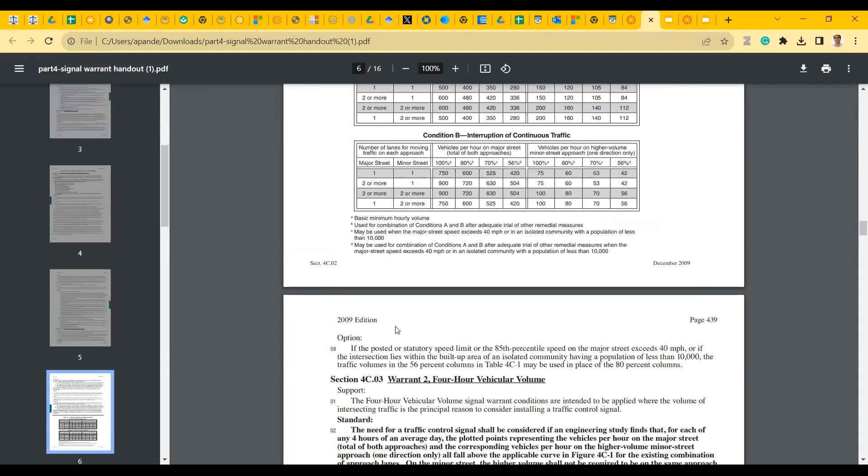The need for a traffic control signal. So I'm looking at 4C4, paragraph number 3. I probably should open the traffic signal warrant module here as well. One second. So this is the warrant handout, the one that I'm reading from, 4C4 paragraph number 3. Let's go back and... so here we are, 4C4, paragraph number 3.

Okay, so first thing it says: signal warrants should be applied only in unusual cases. So they're already talking about it. It should be unusual cases such as office complexes, manufacturing plants, industrial complexes, or high occupancy vehicle facilities that attract or discharge a large number of vehicles over a short time. So HOV facilities, that would be your trucks, or sort of your buses, right? So if you're basically right outside a bus depot, those are the situations where you want to be applying that.

So that's pretty important right here. The need for a traffic signal shall be considered if an engineering study finds that criteria in either of the following 2 categories is met. So there are 2 categories, A or B, and it's either of those. Within A, it's all 3 of those. So it's pretty confusing, that's why you have to be very careful as you're applying this. For example, they're saying either A or B, but within A, it's not just one of those 3 — it has to meet all 3 of those.

Okay, so that's my question for you. In the example problem that I supplied last time, please let me know if you're meeting the peak hour warrant. So let's take maybe the next couple of minutes, look at that warrant, and see if it's meeting that warrant.

Extras of that. Oh, okay, so let's see. Let me see. Yeah, and also I might have some extra copies there. Let me see, so you're looking... but you have the signal warrants though, right? Yeah, you have the warrants, right? So let me see if I have an extra copy of this. So the problem is in the notes, but you probably don't have the notes.

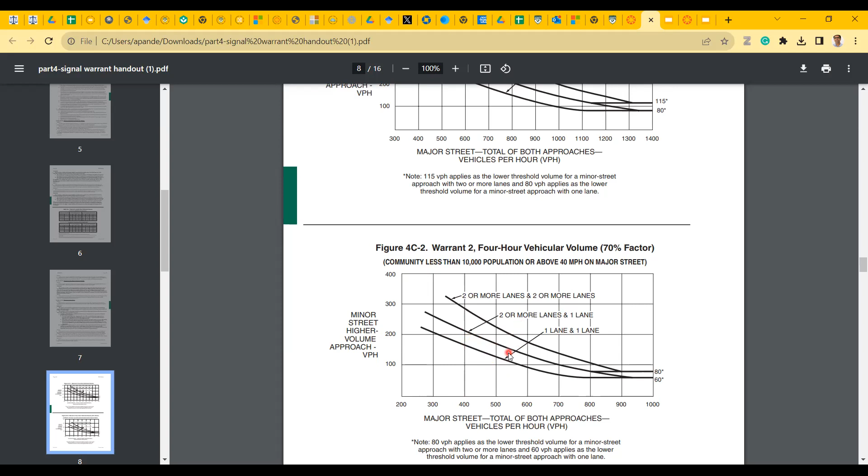Let's now look at warrant number 4, go back to the next section on this pedestrian volume warrant. And this is again a warrant where, because pedestrians are vulnerable road users—even though I wouldn't call it necessarily a safety warrant—this is where I would be a little bit less conservative about installing a signal. I would want to maybe install a signal just to take care of the pedestrians.

Isn't there a modern understanding that with the pedestrian warrant, rather than installing a signal, it could instead just warrant a pedestrian Hawk signal? Yeah, pedestrian hawk signal is another option.

So again, for all the signals, if you want to go ahead and put in a signal, remember we talked about how at the very beginning of this warrant discussion, they say exhaust all the alternatives first. So those will be sort of your alternatives that you have to think about. I know this is kind of a lot to process at this point, and maybe it's not exactly like something we do this way and that's the way it is.

That's just not the way things work in traffic engineering, right? So there's definitely a good point that you could consider a flashing pedestrian signal where pedestrians can push the button and then it turns red. Pretty good treatment there. But again, if the volume becomes too high, maybe that becomes an issue, right? So that signal warrant is there for the volume of the pedestrian. We are not going to put in a signal if you're not meeting the warrant necessarily.

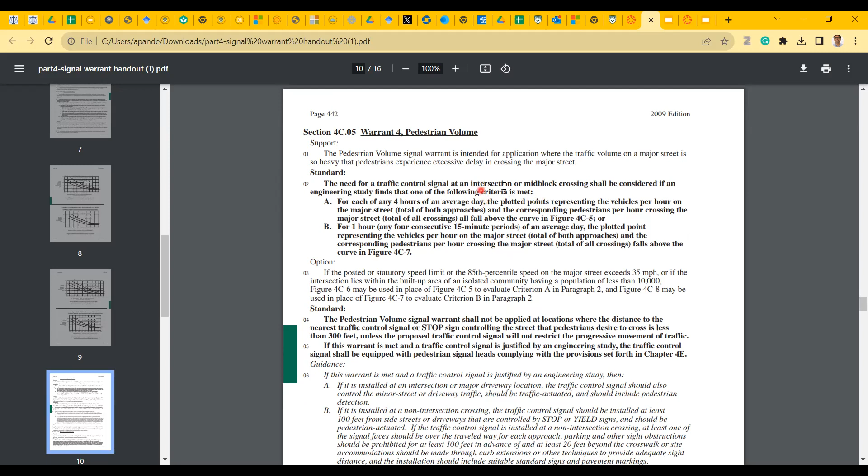So let's see what it says here: intersection or mid-block crossing. And then 4C6 is available too for us. 4C6 may be used for 4C5. Again, this is like that 70% condition that they're interested in. And then 4C8 may be used in terms of 4C7. So again, they give you some outs, but in this problem, that won't be an issue. But you want to be able to read and make sense of these. Just make sure that this is all making sense to you as you read through it.

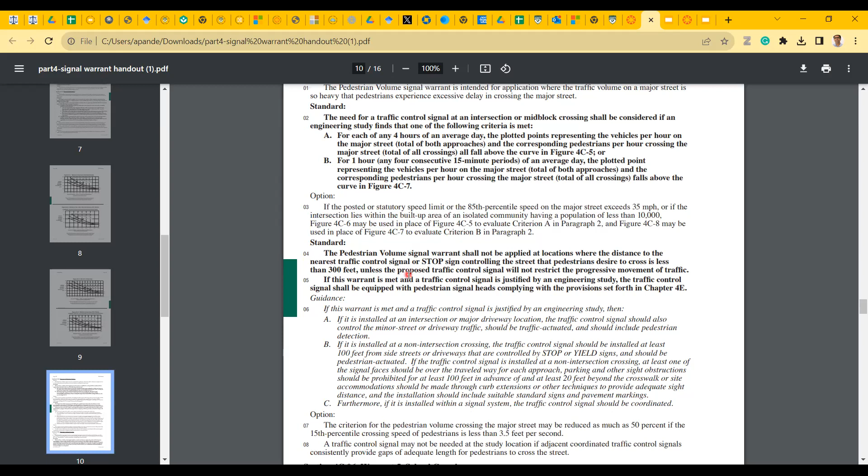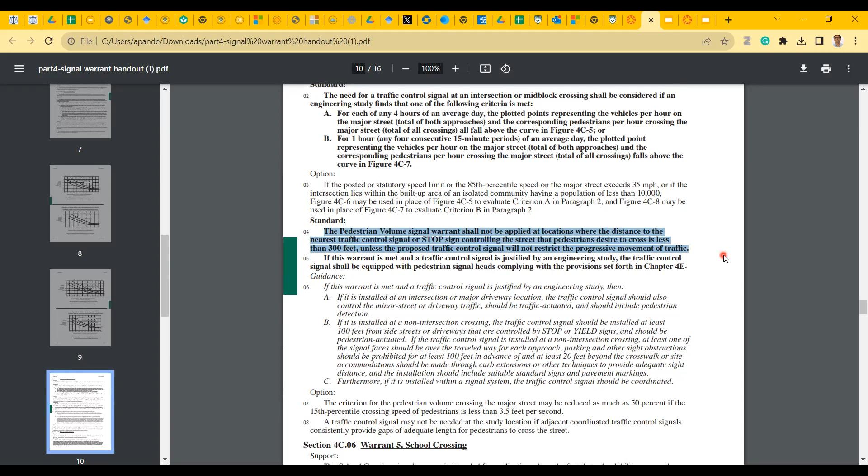Now, this is a statement that hopefully will change. I think they are going to change it in the future MUTCD, and I'm going to zoom in here a little bit more so you could see. This is the kind of language that a lot of modern traffic engineers don't like about MUTCD.

What do you think is my problem with this? What do you think is the issue here? Any thoughts on that? Anybody? Do you anticipate any problem with this at all? Yeah, basically that just encourages jaywalking, because by law, it prioritizes vehicle movement quite a bit.

And I'm not even, so this 300 feet, okay fine, you want people to be able to walk 300 feet in either direction. That could potentially be a longer walk for folks. And by putting in that last part of the sentence, unless the proposed traffic control signal will not restrict the progressive movement of traffic, that just sort of gives an indication that now you're prioritizing vehicular movement by a whole lot. That's something you have to be careful about, especially in this day and age.

Yes, I do know there is the issue of putting traffic signals too close to each other, where it's a safety issue for rear end collisions. They might confuse one light with the other.

That's absolutely right. So yeah, 300 feet is sort of a big threshold, and that should be okay. But you have to be absolutely clear, because sometimes we have to put two signals close to each other, and we have to make sure that the two lights are timed in a way that is a forgiving environment. If the two lights are close together and you don't know if drivers are going to see either one, you want to make sure they're timed so they don't cause confusion that leads to safety issues. So that's another thing to note there.

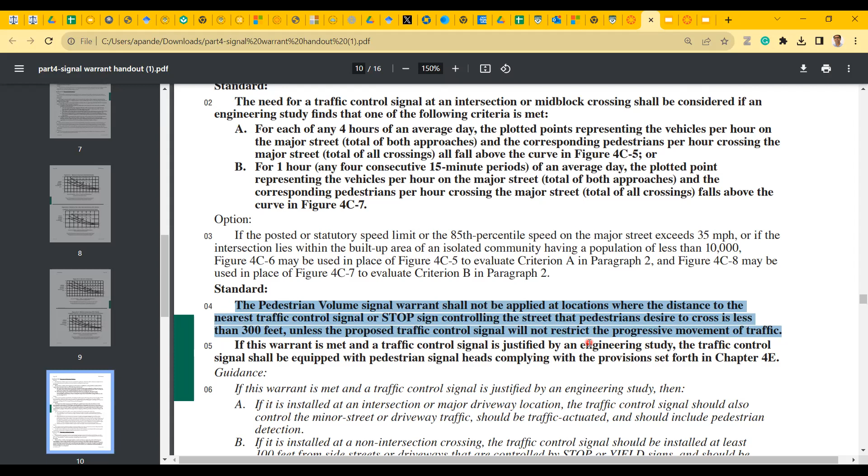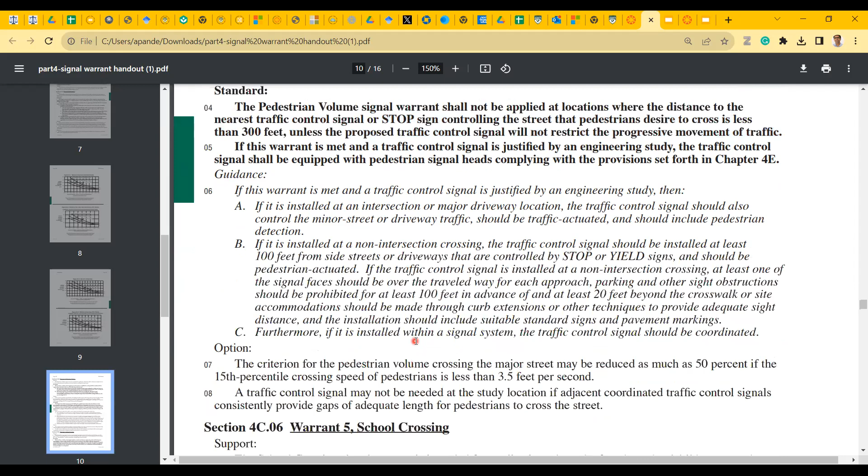Okay, so let's look at this 4C5. If you look at the option here, the criteria for pedestrian could be reduced by as much as 50%. Remember, this is what I talked about in the slides about the data you're going to collect - what type of data is necessary? Pedestrian volume during peak hour, noting elderly and disabled - that was exactly done for this warrant, thank you for pointing that out. So this is the option: if you're expecting slow walking pedestrians, you might have to be worried about this. There's no indication of that in my problem statement, so I'm not going to worry about it, but it's something to think about as you're analyzing your data. If you had a lot of pedestrians, slow walking pedestrians, then you could reduce it by 50%. That's pretty good that we should have that.

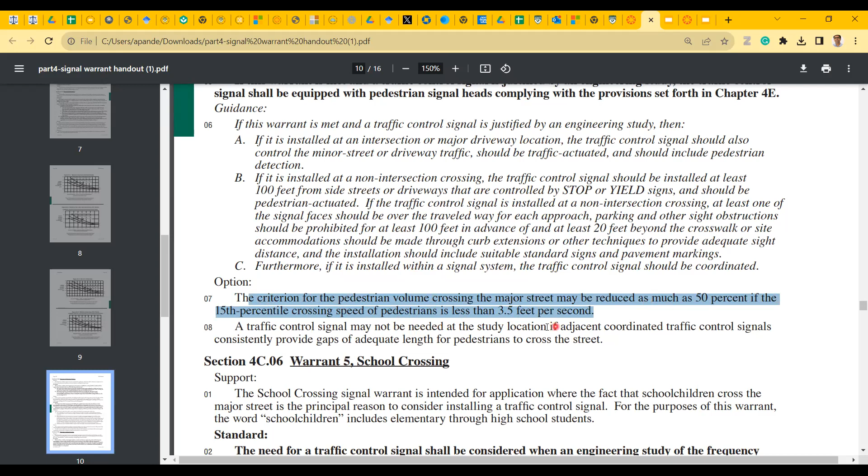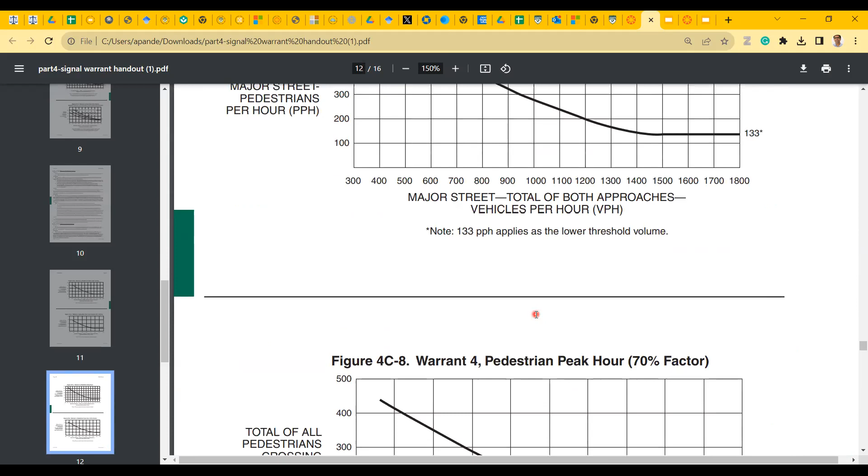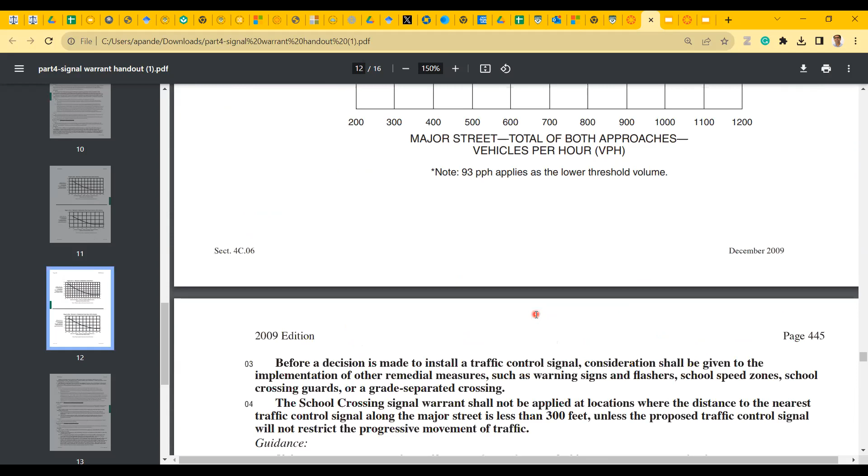Now, school crossing warrant. This is pretty similar to the pedestrian warrant, but it's about school crossings. This is not the figure - 4C6 and everything are for pedestrian warrant 4. But warrant 5 discussion begins here on page 445.

The School Crossing - again this is the 300 feet language, which is fine, but you're talking about other remedial measures, which is pretty important. See if you can provide grade separated crossings and all that.

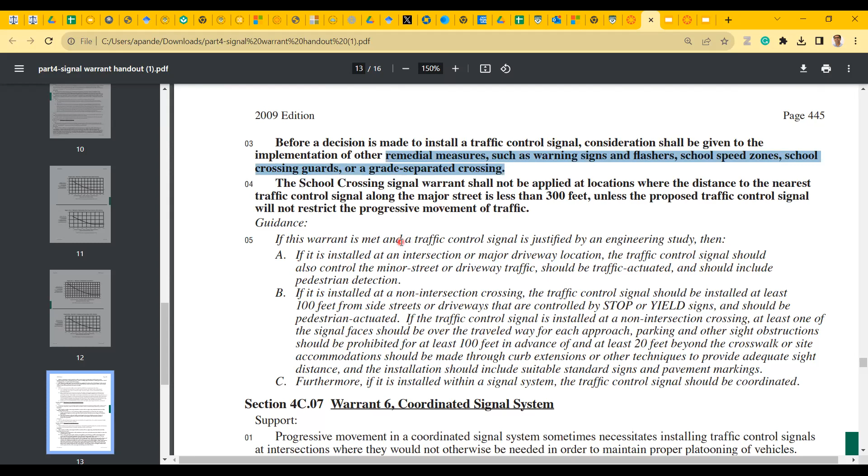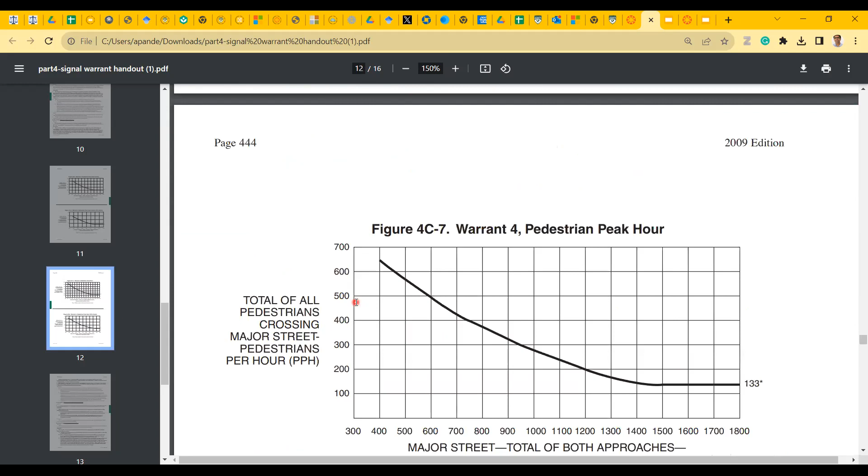The warrant itself is pretty similar to the pedestrian warrant. Frequency and the adequacy of gaps in the vehicle stream as related to the number and size of groups of school children at an established school crossing across the major street - this shows that the number of gaps during the period when school children are crossing is less than the number of minutes in the same period. This is kind of convoluted to write. There has to be 20 school children crossing during the highest crossing hours. That condition is pretty easy to meet for most schools, unless it's a very special education type school, but in most cases you'll meet that last part.

But here it's a convoluted way of writing, saying okay, if you don't find gaps equal to the number of minutes in that period - so if you have a 60-minute period, you should have 60 gaps. But I don't think school traffic persists for 60 minutes. School traffic will typically persist for maybe 20, 30, 40 minutes or something. So that's basically the number of gaps you need to have, otherwise you need a signal at that location. So something to keep in mind.

Number of adequate gaps - you need adequate gaps in the traffic stream. So if it's a 30-minute period where school activity is in the area, then you need 30 of those gaps within that period, so that school children don't have to wait more than 1 minute on average - that's the most important thing. So maybe when the bell rings, and maybe 2, 3, 4 minutes after that, you start your period of school activity, and then maybe in the next 20 to 30 minutes, depending on how big the school is, that's the amount of time it'll take.

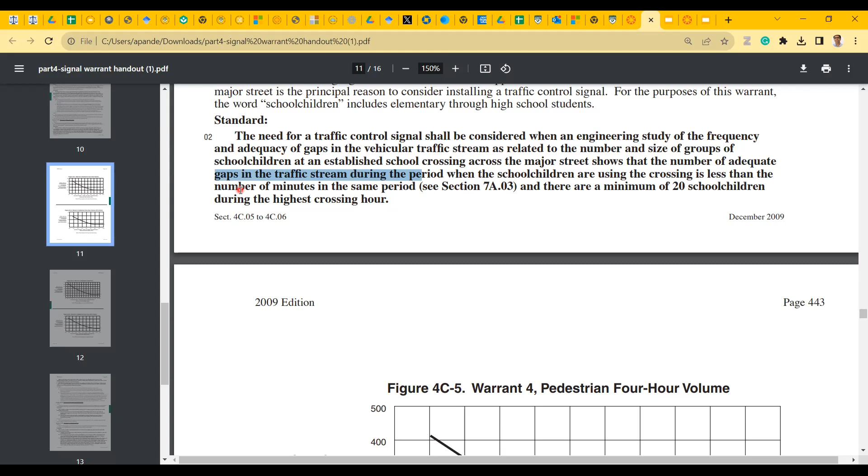So let's see, this is the school children.

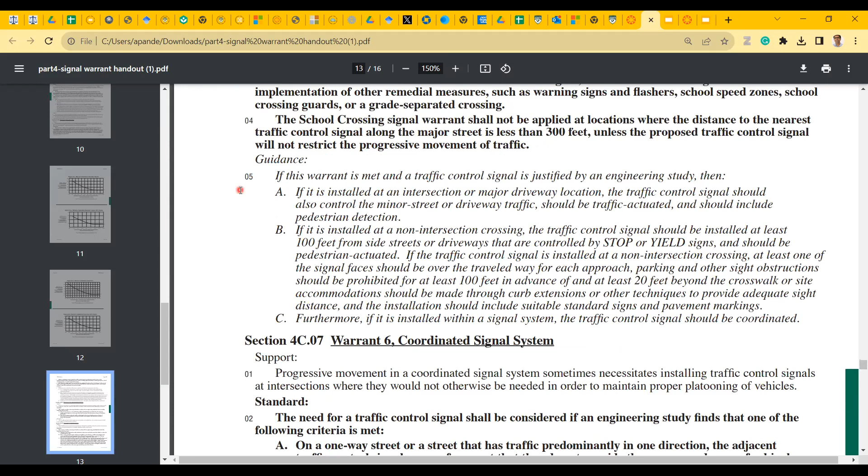Yeah, so there are some things you have to make sure you take care of. Install in a non-intersection location, like a mid-block crossing. It should be installed at least 100 feet from side streets or driveways, to make sure people aren't turning right into it and can still see the signal. So those are the conditions that are there.

So anytime these warrants come up, it's always a good idea to give it a good read before you do anything else, just so you know what all things you have to take care of as you're reading through it.

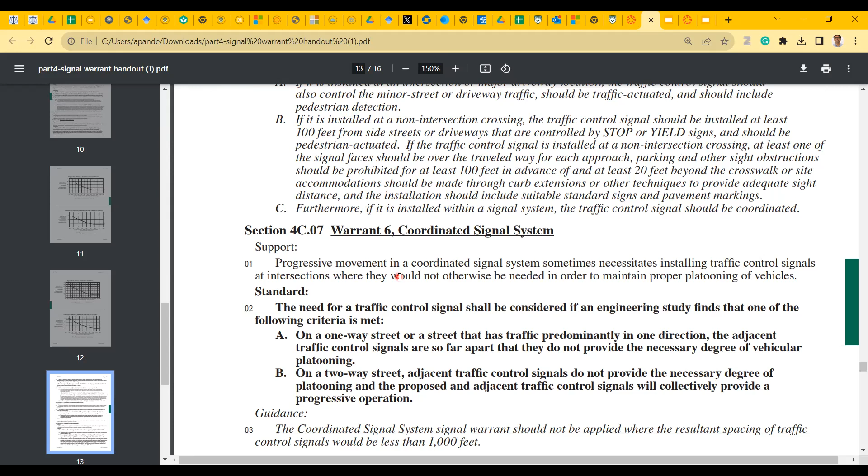If it's a case like that, with a mid-block crossing, and there wasn't a designated crossing there before, how does it decide? If that happens in my own city, and there was no crossing there before, is that just a random case? So if I'm understanding your question correctly, what you're trying to say is, what if you're not meeting this 100 feet condition, or the number of crossing conditions in the warrant, because there wasn't a crossing there before?

So what you're describing is that there is no existing demand because there is no crossing. Yeah, but then once there would be. Yeah, that's a great point. I was just going to look for an answer, probably because they looked at it in a safe route to school study, which has different parameters, or a different focus from a traffic operation standpoint. Yeah, so that's a good point, right?

It's like an old joke, like sometimes people will talk about how we're not going to build this bridge on a river because we don't see people trying to swim across the river a whole lot, right? That's the same idea, the same point you're making, that we don't have the crossing.

But typically what you want to do in that location is look at where the traffic is actually going. And again, if the kids are having to go a whole lot farther, and if you start to see even a few kids jaywalking, then I'd probably consider a roadway network warrant for that, like estimating a future condition. If there is, for example, that's one way of justifying a traffic signal there.

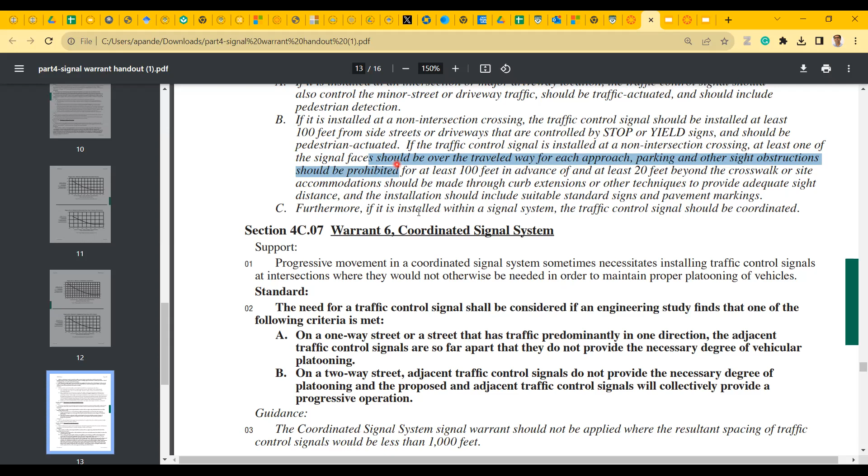Coordinated traffic signal - this is something relevant if you already have a coordinated signal system, but now there are one or two driveways where there are a lot of right turns or left turns happening, and you don't have that accounted for, and that's causing a problem. So that could justify a traffic signal.

But again, you have to make sure that the coordinated signal should not be applied where the resultant spacing of the signal would be less than 1,000 feet. So if the resulting spacing between traffic signals turns out to be less than 1,000 feet, you shouldn't worry about this signal. But if it's more than 1,000 feet away, and you're seeing a lot of merging from those driveways, you can start to think about signalizing that driveway.

An example of a coordinated signal system is where you have two traffic lights, and in between them on the corridor you have an all-way stop. That all-way stop could be the warrant to replace it with a traffic signal. But in a coordinated system, you probably don't want an all-way stop anyway, because then you don't know what speed you're going to use. Maybe a two-way stop could be converted into a traffic signal that way. In a coordinated signal system, the whole idea is that once the stream gets moving, it keeps moving throughout.

There is some talk about optimizing that stream for bicyclists, and there have been some implementations of those. If you optimize for bicyclists, you can actually encourage drivers to slow down too, because if they know this is optimized not for 40 miles per hour but maybe 18 to 20 miles an hour, drivers would be encouraged to drive slower as well, and that's where they'll get all the green. There are some real world examples of optimized or coordinated signals, and in this class we'll learn a little bit about optimizing the signals as well.

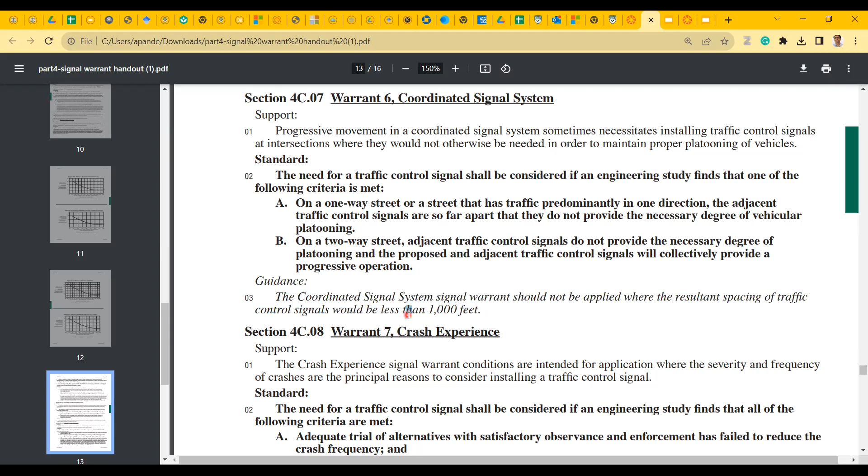So, this is again, if one of the following criteria are met, you only have to meet one of the criteria.

And I talked about platooning, did I talk to you about platooning? I think maybe in 222 class about platooning because they're going to do a spot speed study. But platooning is basically when vehicles bunch together so they have similar speed, and they kind of move together through the traffic stream. If the two signals are too far apart, the platoons get split up because some people drive slow, some people drive faster, and that leads to split up of the platoon, which is not good for coordination.

So we try to avoid that. If we see breakup of platoons happening, we want to provide a signal in the middle so we can maintain the traffic platoon. On a two-way street, adjacent traffic control may not provide the necessary degree of platooning. Same thing - you're basically looking at progressive movement of vehicles at an appropriately chosen speed.

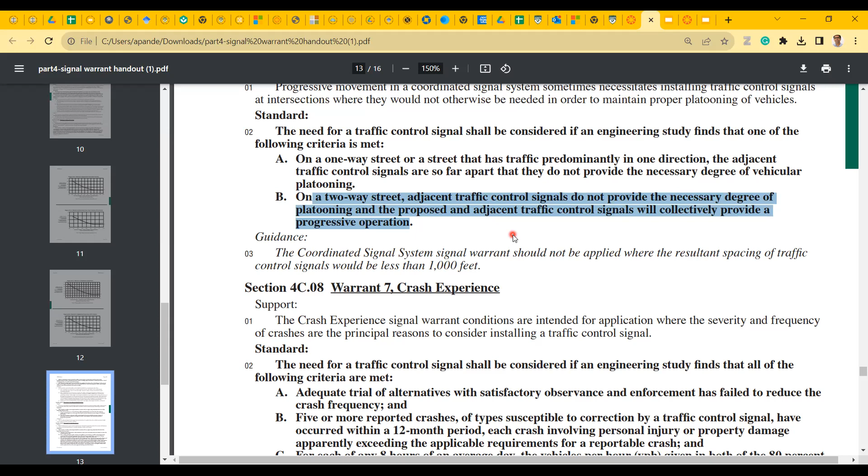In the next module, we'll learn to at least think about how you coordinate the system, what are some of the ways of coordinating, and what the signal timing looks like for that, and how you coordinate actuated traffic signals too. So all of our signals are going to be actuated, but then we pre-time them for the peak hour condition, and then we just run them on a pre-time basis.

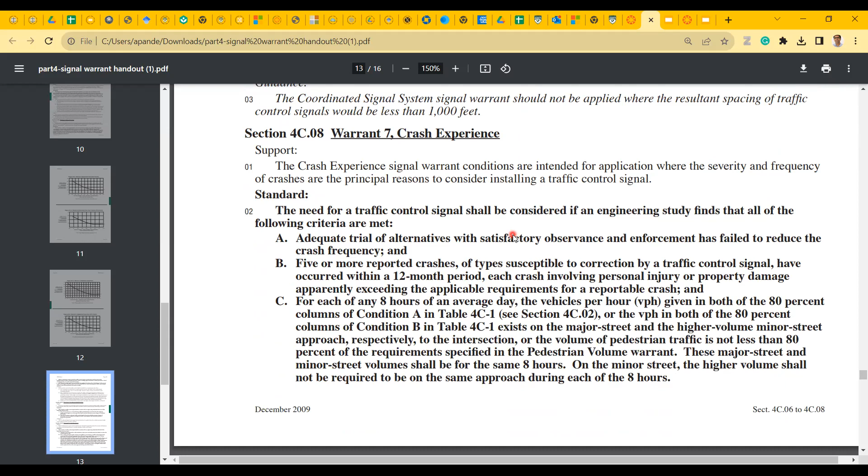Okay, the next warrant, very controversial. This is controversial because of this number right here: 5 or more reported crashes.

Basically, this type of crashes that are susceptible for improvement by traffic signals are your T-bones, right-angle crashes, or left-turn crashes where somebody turning left gets hit by someone going through. Those crashes - 5 - that's a pretty high number within a 12-month period. That's pretty high to me. When you're looking at 5 of these crashes, you're probably talking with newer cars, maybe not as many, but at least when these warrants were written, I'd say you're talking at least 5 people dead on average. Those types of crashes are pretty severe in nature.

So I think that number seems pretty high, and they still have a lot of couching language there. I think this is the warrant where I want to be less conservative and hope - I know it's not out yet, so I can't say for sure, but I'm almost certain this warrant will become a little bit less conservative in being able to put in the traffic signal as we go forward.

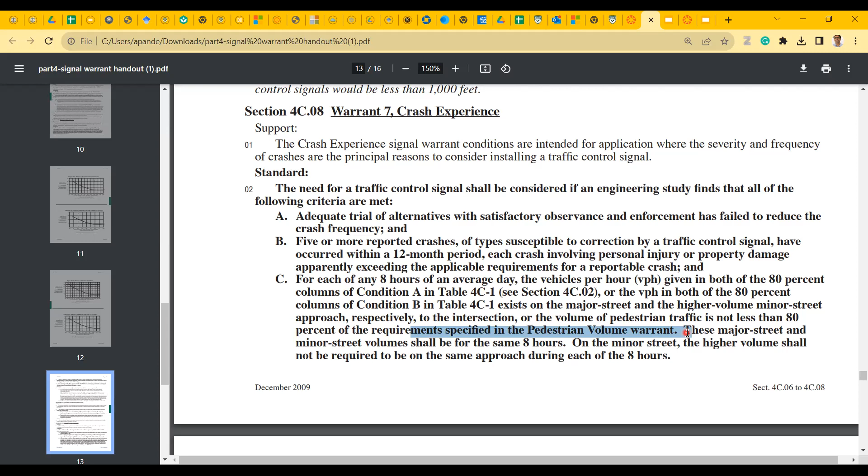So a lot of hoops to jump through for a safety warrant, given that we say safety is our priority, right? Again, we don't want to install traffic signals willy-nilly, but maybe the safety issue should be corrected before it gets so bad. For now, when we are applying these warrants, we're going to apply them as they're written. But as an engineering judgment, we'll look out for the new warrants as they come out and start thinking about what we can do to apply it. Again, it leaves a little bit more leeway if you have higher speeds and so forth.

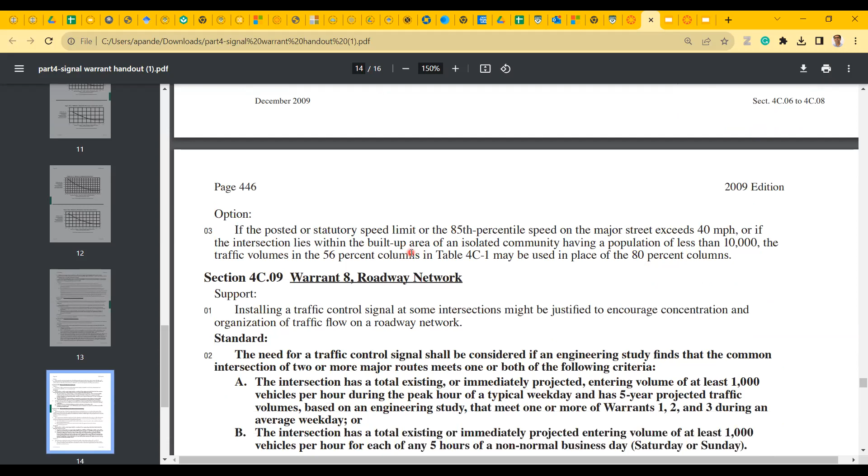So let's try to see if there is enough information for us to evaluate the safety warrant here. Let's go ahead and evaluate the safety warrant. Are there enough crashes that are amenable to be improved by a traffic signal in this case?

So rear ends are definitely not that - you can exclude rear ends. Rear ends are not something that gets taken care of by a traffic signal. In fact, a traffic signal makes the rear end crash problem worse.

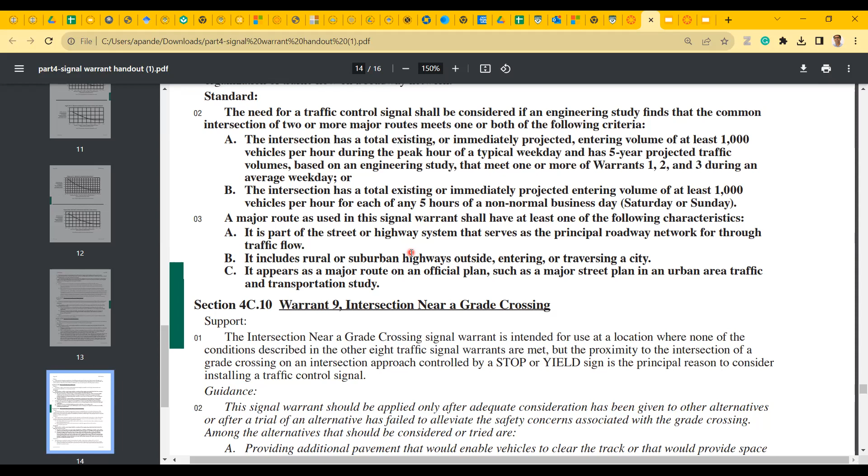What do you think? Any thoughts, any questions? Talk to each other if you need to, feel free to do that. Are we meeting the pedestrian or the safety warrant? Because it is really standard around that.

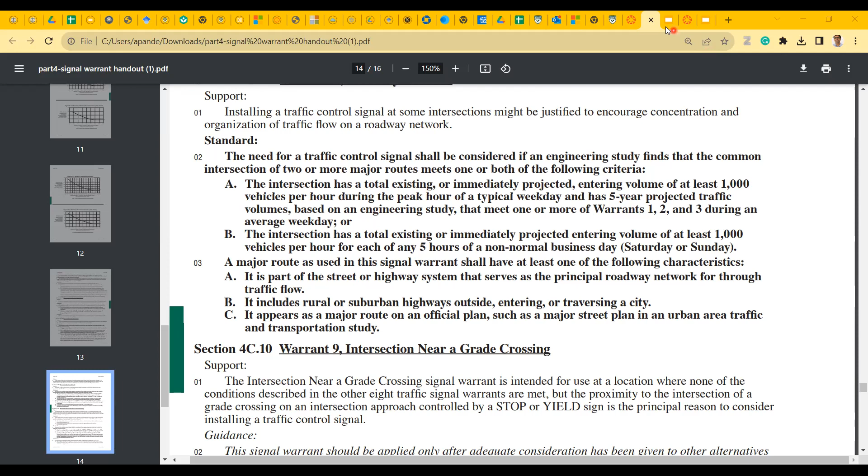Okay, questions, thoughts? So let's think about how many crashes are actually happening if you look at the sheet there - look at your collision diagram. How many crashes are actually happening here that are amenable to be improved by traffic signals? So we talked about those things, right? What crashes are amenable to be improved by a traffic signal here - right angle, left turn, head on. So tell me which of these are amenable here.

Are there enough in a 1 year period? No. Or which ones are there, how many do we have - one or two? So look at this, there is no left turn head-on crash, right? I don't see any left turn head-on crash.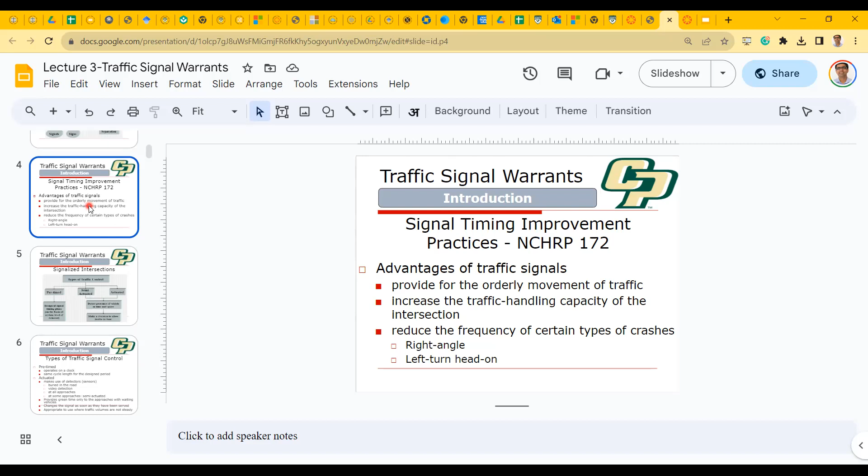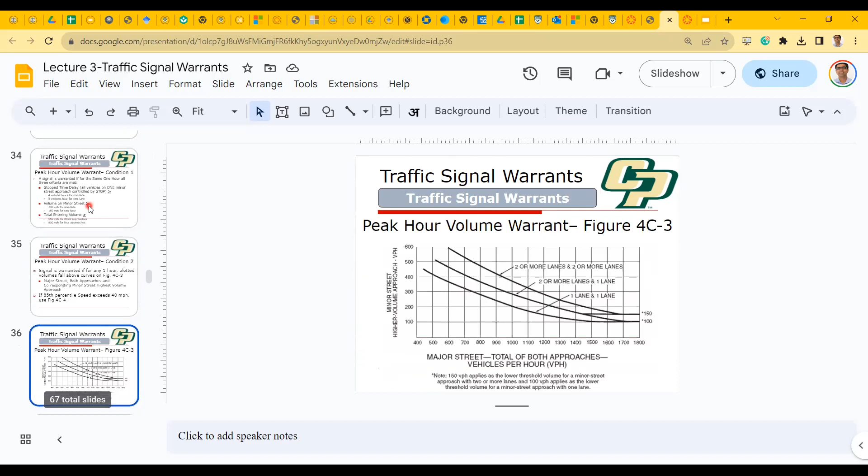So let's look at the data here - collision diagram, do I have it here? Okay, so I don't have the data here. Okay, so if you look at the chart that I shared with you, the problem statement, you will see that there are 6 different crashes here. 5 and 6 are rear end crashes, 1 is a side swipe, 4 is a side swipe, and 3 is a side swipe as well. And then 2 is a right angle crash. So actually, there has been only 1 crash that matters - that means you're not meeting the safety warrant at this location. Okay? So yeah, sorry.

So if you look at that chart, you have to be careful - for some reason I thought these were the numbers, but no, they are basically describing the 6 different crashes. The collision diagram just describes those things, unless there are so many collision diagrams that representing it becomes an issue. But in this case it's just 6 different crashes, and they're drawing them out at each location. So that's what it is.

Okay, so safety warrant is not met then. Let's look at warrant number 8.

Warrant number 8 is about roadway network. So roadway network warrant is existing or immediately projected at least 1,000 vehicles on a typical weekday that meet one or more of warrants 1, 2, or 3 on an average weekday. So you only have to meet - finds that common intersection of 2 or more major routes, meets one or both of the following criteria.

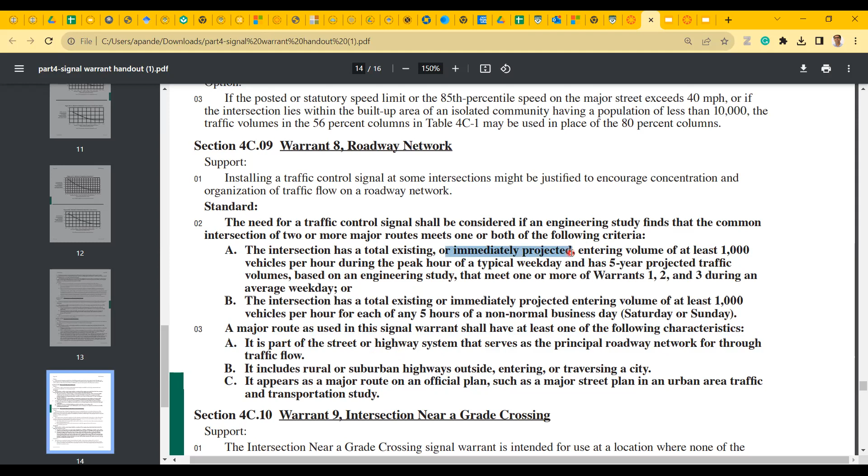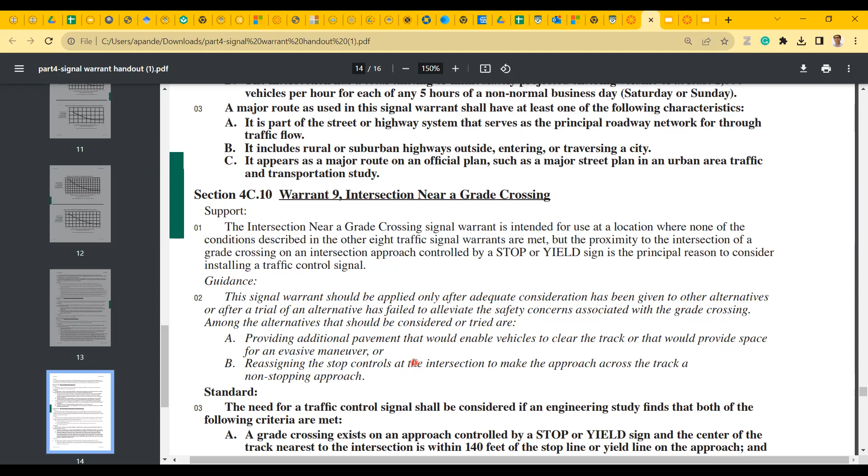And then let's look at the last one. The last one is not applicable either in this case, because the nearest railroad crossing is 2 miles away, if you look at the problem statement. So I'm not going to worry about it, but this is something that you have to think about.

I think this may have been the warrant - I mean, we have enough traffic here, so maybe not. But if none of these other warrants were met, we would have looked at this warrant to put a signal on Foothill and California, because we are at that close location on Foothill Boulevard. But again, that will probably meet all the other warrants as well - there's such high traffic there, so we wouldn't worry about this.

But if you look at the standard for this, it's to take care of the railroad crossing. So when you say grade crossing, that could mean a lot of things - grade crossing could potentially mean all intersections are grade crossings. But here we're talking specifically about the word that's not mentioned here: railroad. So it's a railroad crossing we're talking about.

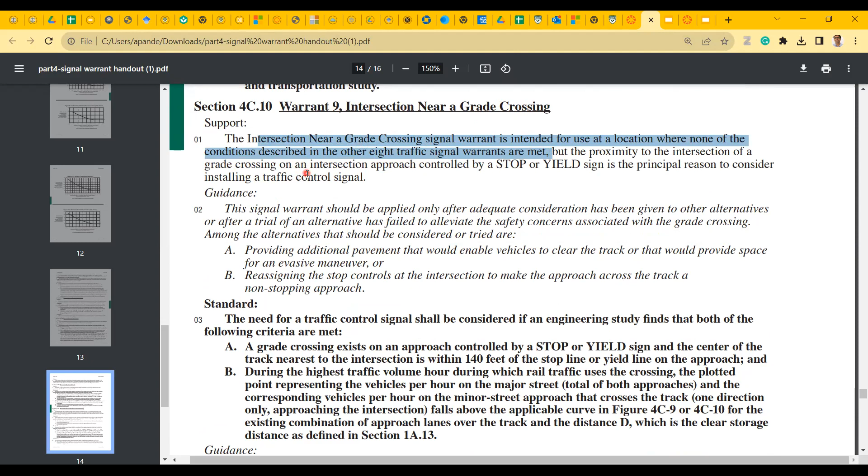So warrant 9 is about railroad - the intersection near a grade crossing signal warrant. Look at when none of the conditions described are met, but the proximity of the intersection to a grade crossing on an intersection approach is controlled by a stop or yield sign. Okay, so this is a diagram. This is what you're looking at - you have the major street, you have the minor street on the grade crossing. You're talking about this type of situation.

2 or more approach lanes at the track crossing, and then you have 1 approach lane at the track crossing. Okay, so 2 different conditions, whether you have 1 approach lane or 2 approach lanes. How many do you think we have on Foothill Boulevard? What's the condition there, right?

So you think about it - if you've driven through Foothill Boulevard, how many roads are approaching the railroad crossing? How many lanes are approaching the railroad crossing in each direction? How many approach lanes at the grade crossing - is it 1 or 2? There are 2 in each direction.

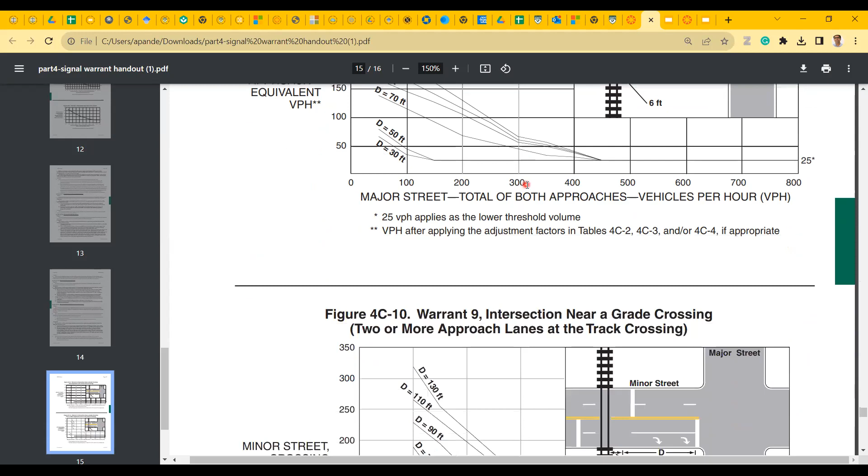So if you were applying this warrant at that location, you're basically dealing with this situation right here - yeah, you are in fact dealing with this situation. And then again, the chart is based on how big is this distance D from the stop line, 6 feet away from the railroad crossing right-of-way here. So this is your D value - D is 30 feet. The thresholds are going to be very low for you to put the signal. Okay, and where are you putting the signal?

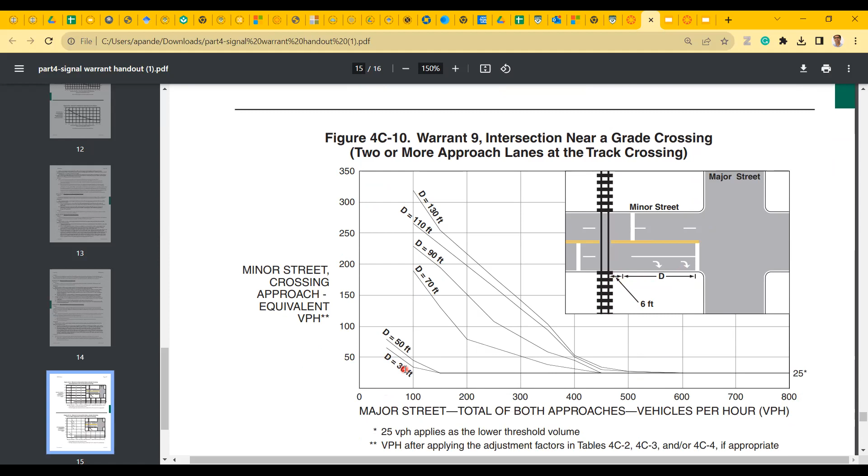So this is another thing that you have to think about. We're not talking about putting a signal based on proximity to the intersection of a grade crossing on an intersection approach controlled by a stop or yield sign. So just want to make sure that you understand that we're talking about putting a signal over here.

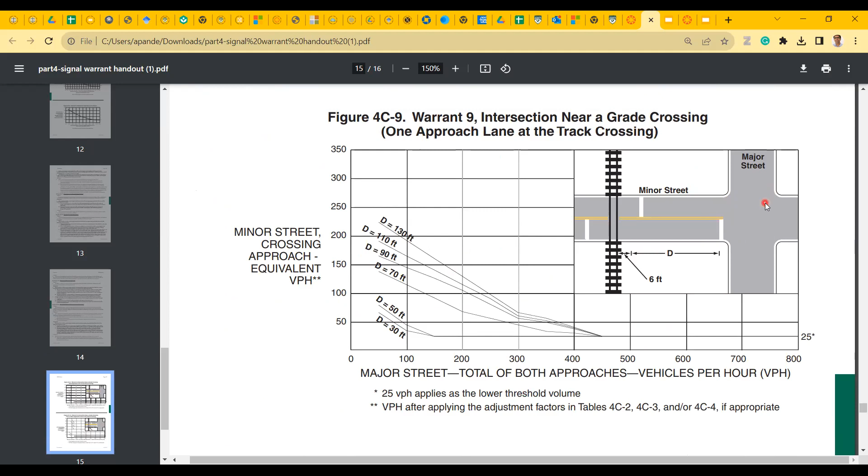Okay, we obviously want to make sure our crossing itself is protected. But the question is, do we need a signal right here? Yes, this is checked primarily to make sure it can be synced up with the preemption, to ensure there's not a situation where a vehicle gets stuck on the tracks.

Definitely you want to make sure that's not the case. You want to make sure the queue near here, the queue on this lane, doesn't back up. You want to take care of this, but you don't want the queue backing up over here and people getting stuck, or a situation where this lane backs up and causes problems over here.

This is going to be a problem if your timing is not clear. If you decide to put in a signal based on this warrant, your timing has to make sure people are not getting stuck here by any means. You'll also need 'do not block intersection' signage and everything to go along with that. You want to make sure there are no vehicles getting stuck over here.

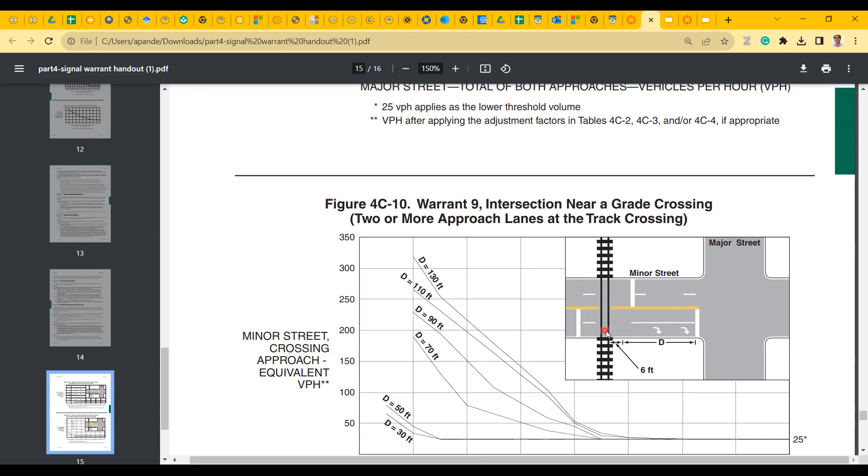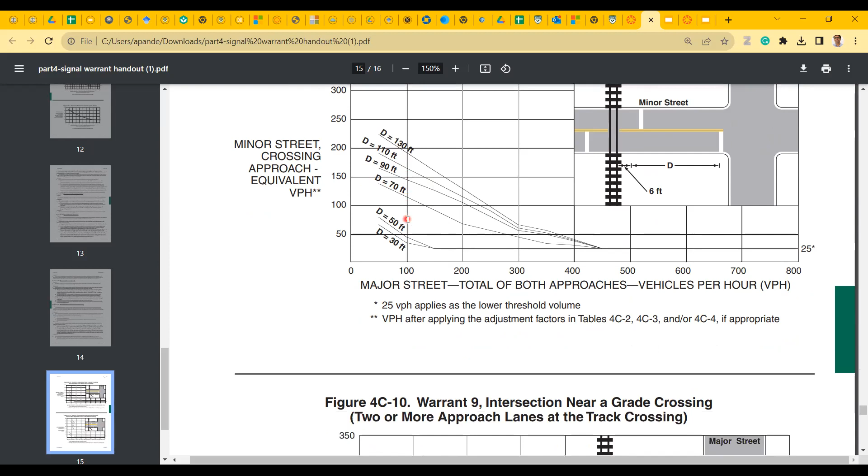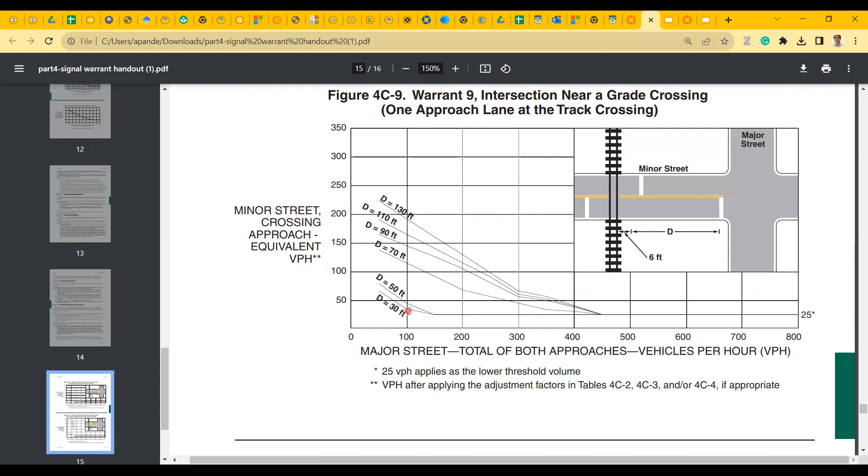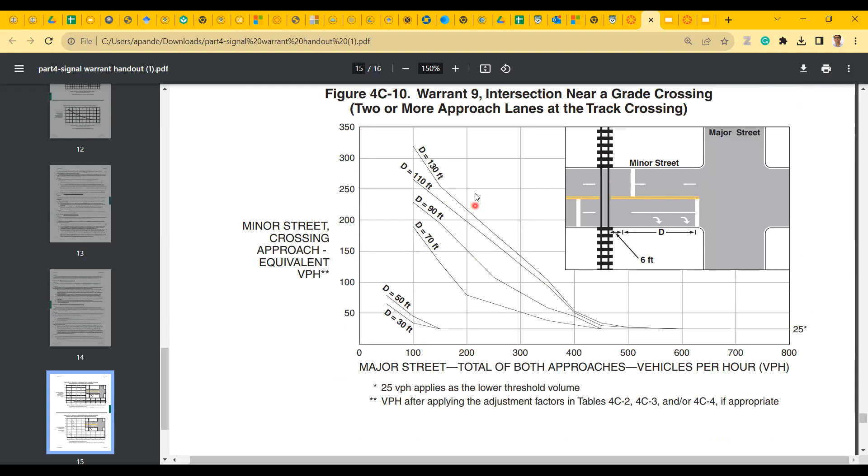The thresholds in this case are going to be a little higher. If you look at just one lane versus a 2-lane approach, here's what the thresholds look like. For 50 feet, the threshold could be as low as 150, and even 150 will meet the threshold on a 2-lane approach. But let's look at if D is a larger number, like 130 feet - then 200 and 250 will meet the threshold.

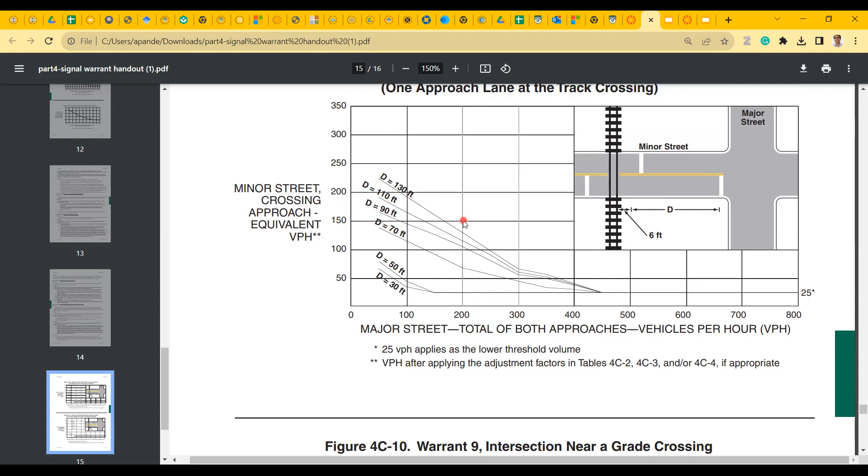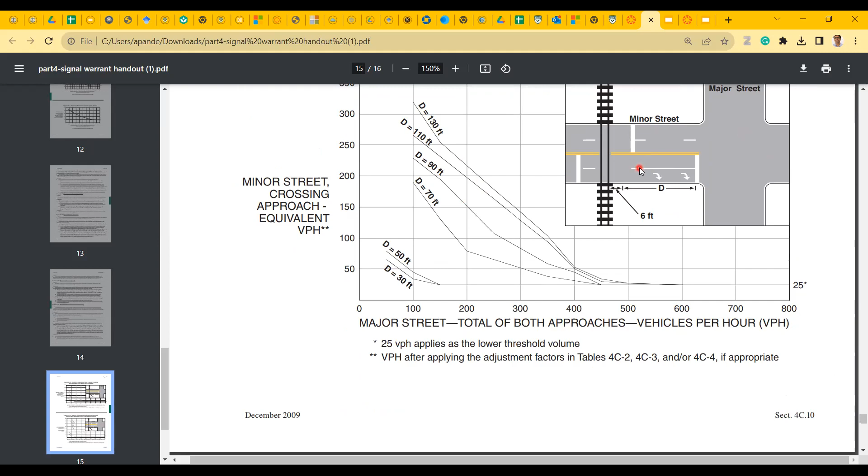Even a lower number will meet the threshold on a 1-lane approach, because with one lane you're backing up the queue quite a bit. But do you see that the threshold goes up when you're talking about 2 lanes? That's because the traffic can divide itself into 2 lanes rather than being in a single lane. So the requirements are more conservative when you only have 1 lane - you'd put the signal in at a lower threshold there.

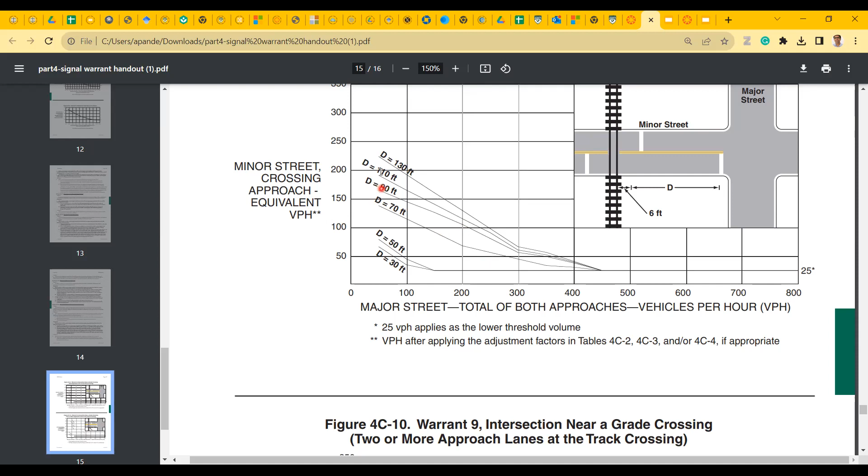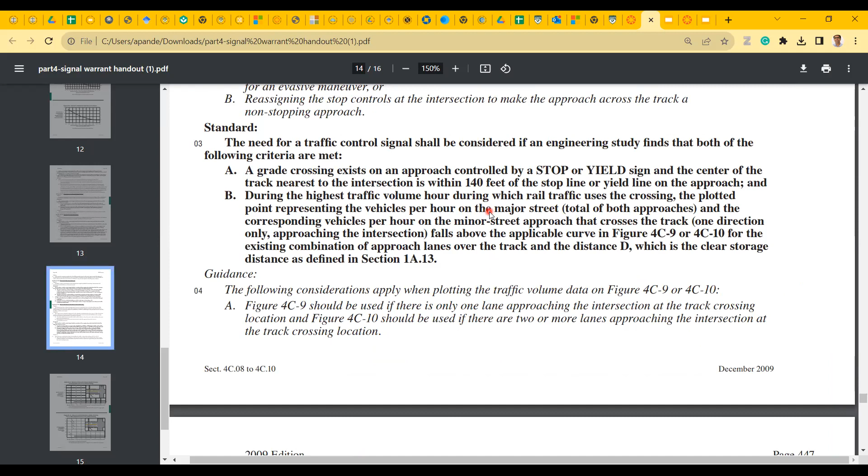So again, you're looking at the chart and seeing where the points fall in this case as well, whether they fall above or below the curve. If they're falling above the curve, then you consider putting a signal in. Reading through the warrants carefully is absolutely critical, and these measurements are critical too - but in the classroom problems they will be provided to you, so you don't have to worry about it. Reading through the language specifically as you're solving the problem is very important.

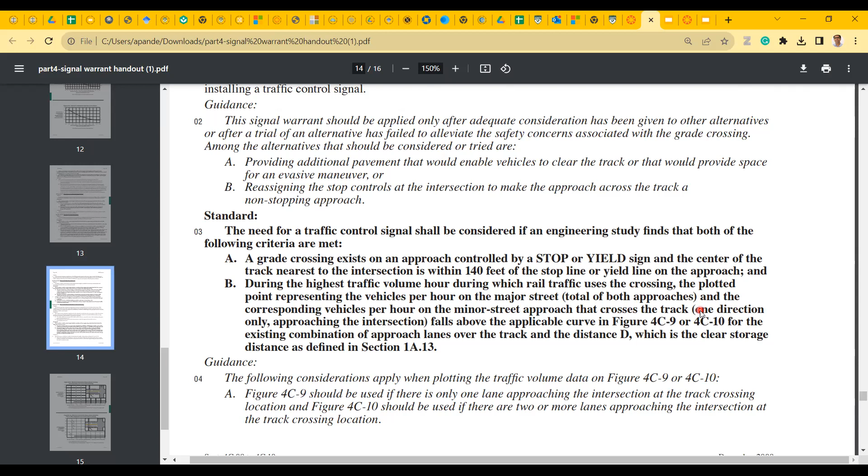So, proximity to the intersection of a grade crossing, or an intersection approach controlled by stop or yield sign - so I think what you're talking about is these ones, right? Those are stop signs. Yeah, I think this could be whatever, even with a crossing guard here. You're talking about putting in a signal over here, because you're talking major street volume and so forth - you're not talking about what you're going to do here, you're talking about what you're going to do over here.

Questions? Other questions?

What would warrant a pre-signal? A pre-signal - basically the intersection is already signalized, but then there's another signal, say on the minor street before the crossing. So for that, it sort of depends on the rail counts - how many cars, how many trains are passing - and you'd look at that from a delay perspective. But here on at-grade crossings, you always provide some kind of signal to get the right of way. So those will always be there - you always want to protect those.

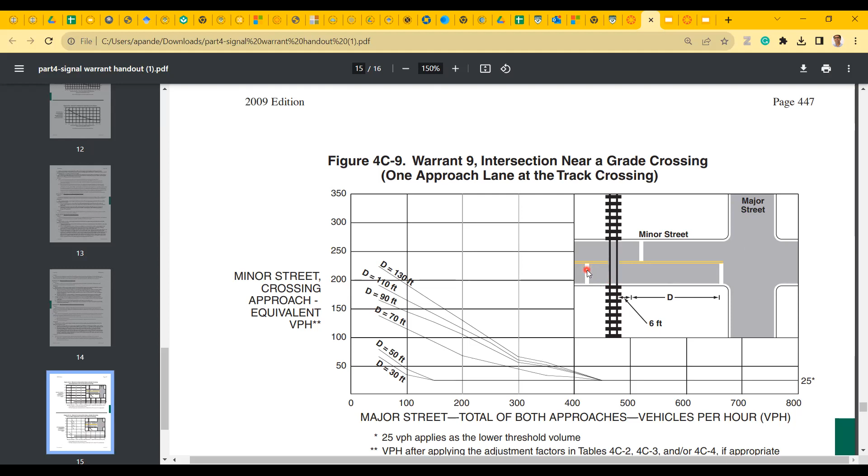So yeah, maybe there is a preference for grade separation, but you would still find it, and especially inside a city, you'll always put in a gate there for sure. So we're talking about the signal warrant for this location, not that one. This is any kind of railroad track - I don't think it covers tram, but this would cover even light rail or heavy rail.

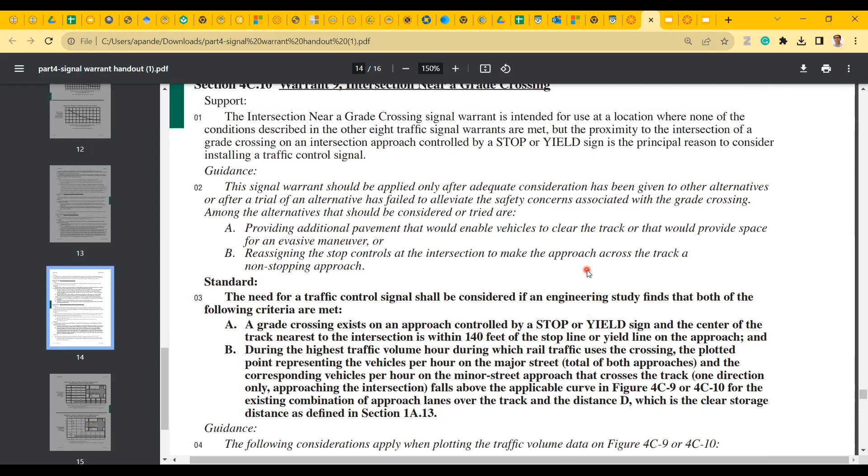Okay, so this is the signal warrant discussion I wanted to have. One thing I want to talk about is that I did extend the homework deadline. Does anybody have any questions for the homework problem? I'll have some office hours on Tuesday before class if you want to stop by. It's due on Tuesday, but I hope you're making good progress. Any questions anybody wants to ask about the homework?

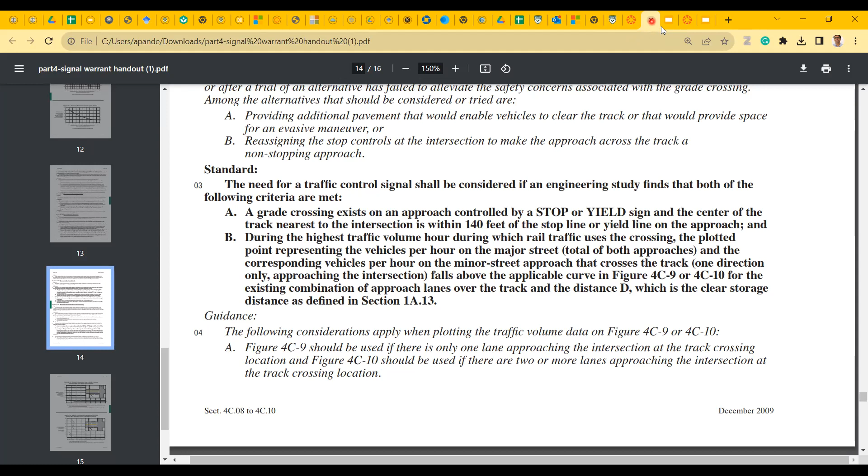So urban arterials would be, remember the functional classification we talked about. The question is, what is an urban arterial, right? Is that the question? Yeah. So let's go back to the question - I don't remember it off the top of my head. Let's take a look. We're talking problem set 1.

AADT for a section of urban arterial is 40,000 vehicles per day. What range of directional volume - so we're asking for a range, right? If you go back to your notes for the first class, there was something about whether it's an urban area or rural area. For those you had different factors, K factor and D factor, that you could apply to get the daily traffic. So an urban arterial would be a road that connects a bunch of collectors, taking traffic from a bunch of collector streets meeting to it.

Remember the functional classifications: you have the minor streets, neighborhood-type streets, then the collectors, then the minor arterials, and then the major principal arterials. Arterials in urban locations behave in the same way regarding how much traffic occurs during peak hour versus off-peak hour. So let's go back to the notes here from our Canvas page - I think this was in the first lecture, traffic engineering elements.

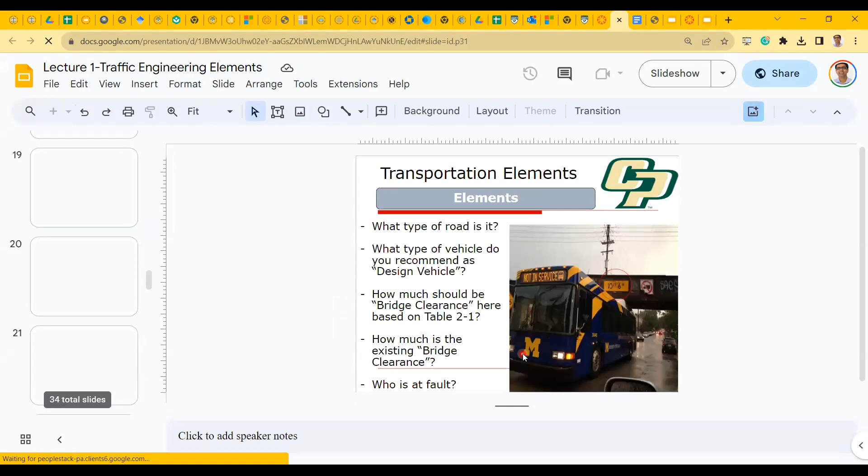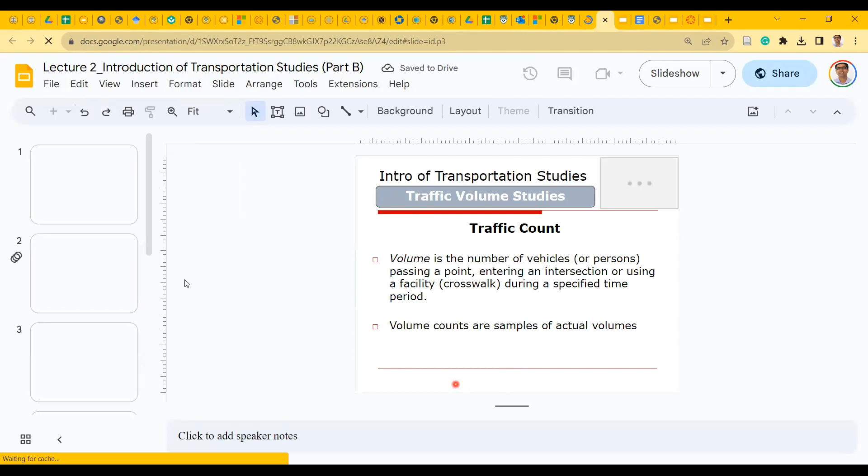Did we talk about it in the next class? Okay, second - the reaction time - or was it lecture 2? Yeah, this is actually lecture 2, sorry, so go back. This is a volume study, I think - this is part of the volume study, part of lecture 2 here. So I'm referring to the AASHTO table - that's it, it should be here, right? I think we showed it here.

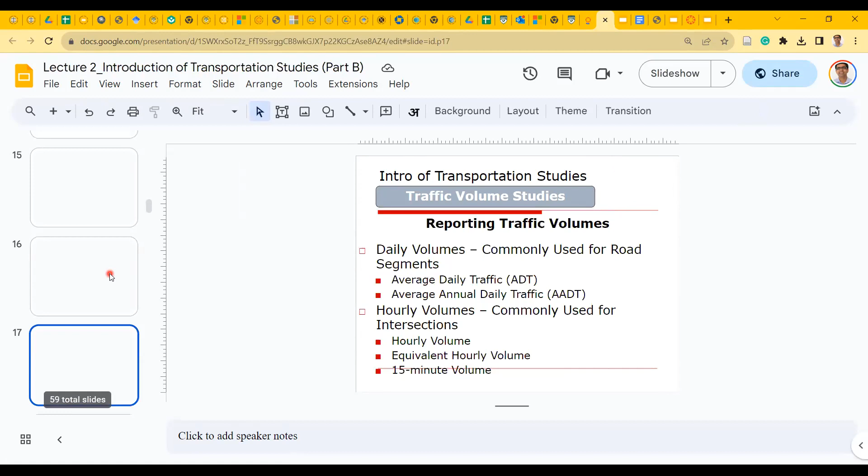So what I'm talking about is an urban arterial. You can almost think of that as something that's probably going to take in traffic from a lot of different collectors. So if you're wondering whether you should use the radial route or the circumferential route, I would probably pick the radial route here, because unless it specifically says you have to use the circumferential route, I would pick radial, since an urban arterial implies this is in the heart of the city, probably collecting traffic from a lot of major arterials. And then, because I'm asking for a range, you'll apply the minimum factors from both sides and maximum factors from both sides, and that'll give you a lower limit and an upper limit for the DDHV. So that's what I'm looking for.

Right. Other questions? Yes.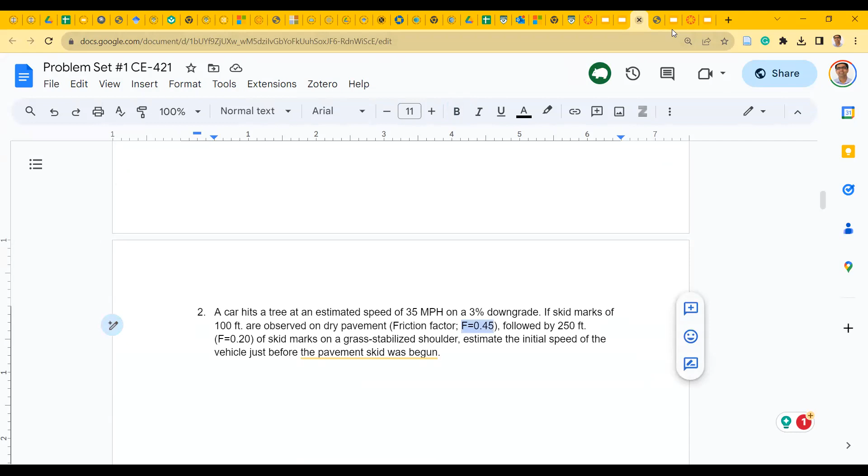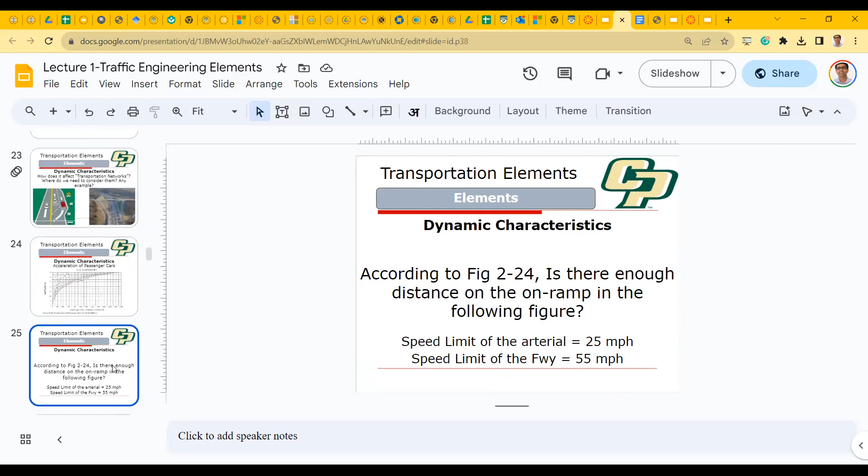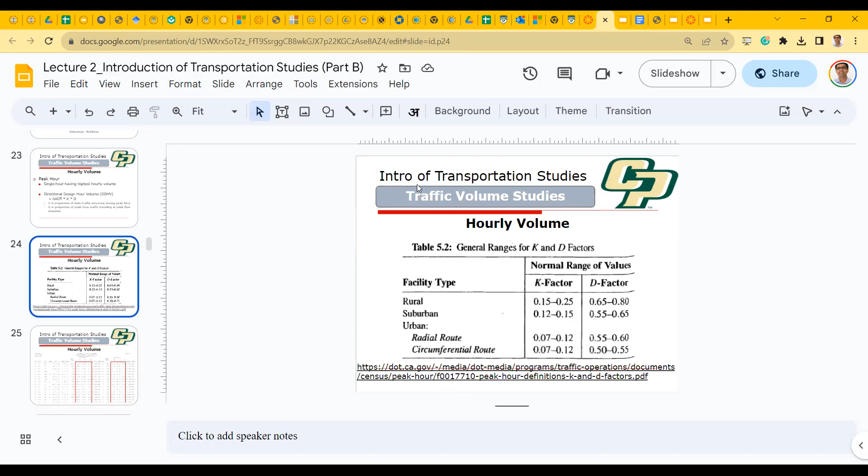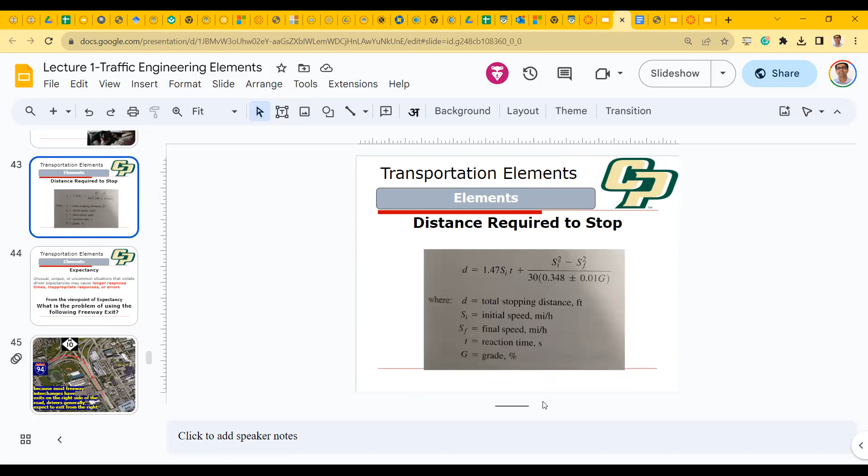Number 2, yes, so this is interesting, right? We talked about the friction factor. There was a formula in our first class when we talked about this. It did not incorporate F directly, but that's kind of what I want you to think about. There was something about the acceleration and deceleration factors, and something about stopping distance, braking characteristics, reaction time... Let me find it. I thought there was a formula I showed you guys. This lecture, Lecture 1, slide 43. Okay, yeah, that's good, 43. Let's look at 43. I know it doesn't have F directly, so that's what I want to talk about. This is the one. I don't know how I missed that. Okay, so the question is, all right, this one doesn't feature it.

So if I'm asking you to apply this formula in that problem, as I told you guys, this is the friction factor that I'm assuming, 0.348 is the friction factor F. This is the standard formula we use, where F is equal to 0.348. It implies a certain deceleration rate, which is 11.2 feet per second squared. So that is the friction factor F. If you replace, when you're solving the problem, your friction factor that's given to you, then you'll be able to derive your speeds. And then you'll have to apply this twice, because you're basically in two different areas. There will be some distance of travel that happens, so you'll have to do it in two stages. You'll go from initial driving speed to the first application of brakes, where you have the reaction time and all of that. And then once you get there, there will be the second friction factor. So your initial speed would be there, but you're already braking, so you won't worry about reaction time at that second stage. There's a lot of thinking involved, but I think it'll become easier if you think of 0.348 as your friction factor. So replace the value 0.348 with whatever value you've been given for that type of surface. This formula is actually F, this is what you're taking F as. AASHTO uses this value of F because it translates into a deceleration rate created by the vehicle of 11.2 feet per second squared.

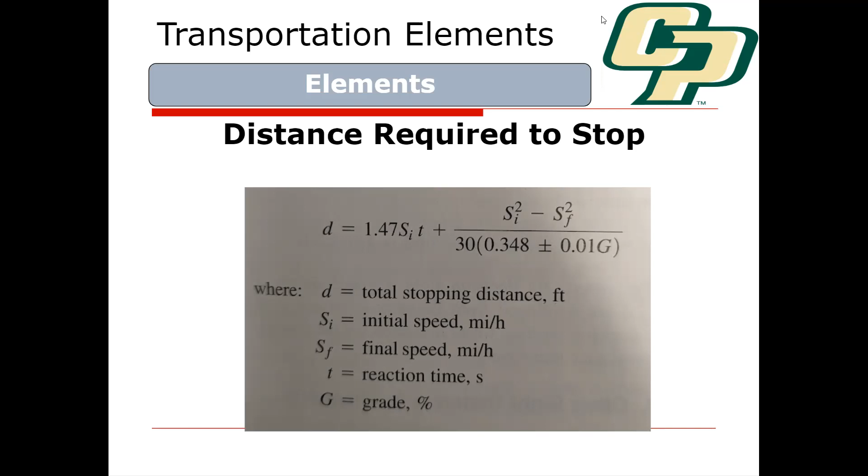Yeah, I'm always curious. And this is another thing about signal warrants. Just one last thing I want to say: talk to a traffic engineer. Everybody has a warrant story, right? If you work long enough, you always have a warrant story where you had to either put in the signal or not put in the signal, and maybe there was some good back and forth about that at the public council meeting or whatever.